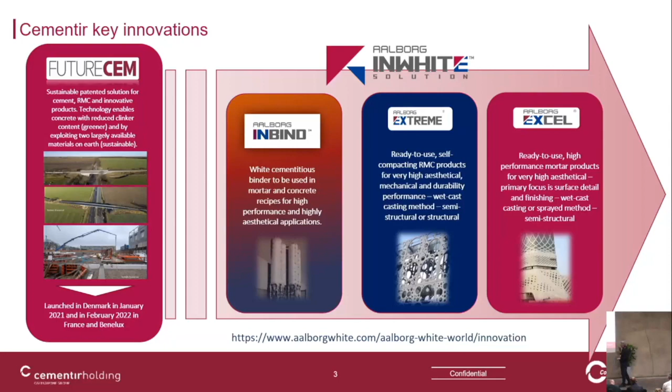This is the innovative solution part, so reducing the carbon footprint by reducing the material used in construction. So lower CO2 emission per square meter. Why choose our solution instead of the others? UHPC is an advanced technology for ultra-high performance concrete, and we know there are many benefits, mainly fast building, because based on precast with this material you can build very fast, reducing wasted time during construction.

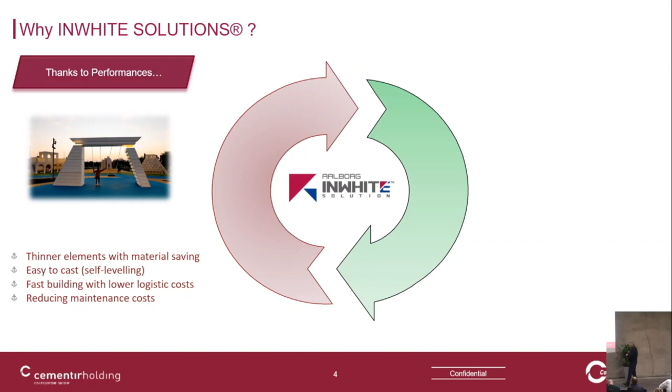For sure, using lighter material is a benefit for transportation cost. And generally speaking, having a thinner material benefits the overall construction because you have more square meters available for the people inside. But what is more with InWhite is the FutureCem technology. Compared to normal UHPC, it is a combination of the two solutions. So less material, and material that has a lower carbon footprint.

So it's a double effect approach on construction, because FutureCem, compared to other cements, relies on more sustainable material. It's not relying on silica fume and the others, but on calcined clay. This is more natural. And limestone is the second most available material all over the world. The key element we would like to share with you is the low carbon technology. You can achieve the same performance while lowering CO2 emissions. This is the key point.

And using materials like calcined clay together with limestone, you have an enhancement of durability. So all our products, which my colleagues will also show, are tested with different exposure classes and so on, guaranteeing durability. Because sometimes durability and low carbon attributes are not aligned together.

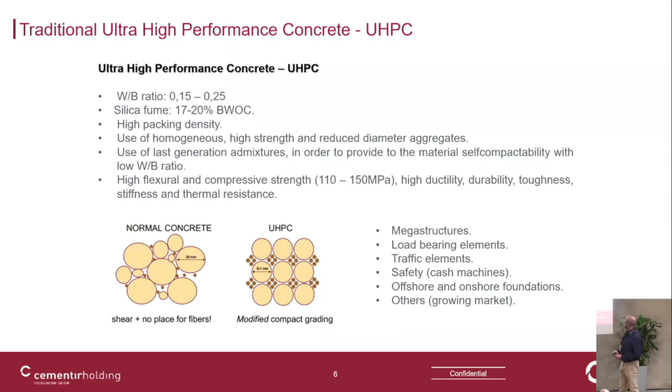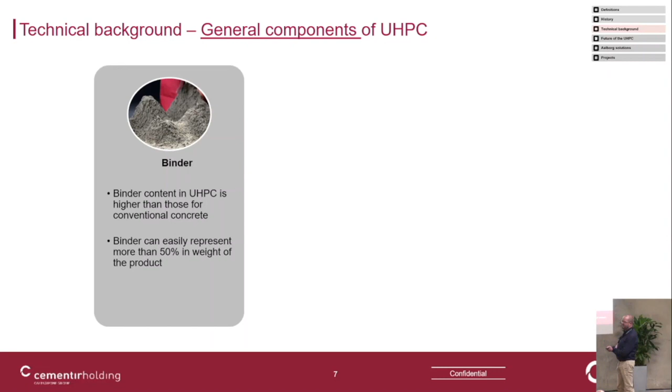Then if we take a closer look at the composition of these premixes, we have, of course, first the binder. In this kind of mix design, you need a really high content of binder, and that can represent more than 50% in weight of the product. Of course, then you have the aggregates, or let's say the sand fractions that we use, with a maximum diameter between 0.5 and 3 millimeters.

And then, to make the UHPC, you also need the fibers to have the flexural strength. And in our approach, that's maybe a bit different than other similar products, we leave the choice to the customer which type of fibers to add, and also the dosage. For structural applications we apply steel fibers, or you can also choose stainless steel fibers. And for decorative applications, you have more the PP fibers, polypropylene, or PVA, or even glass fibers.

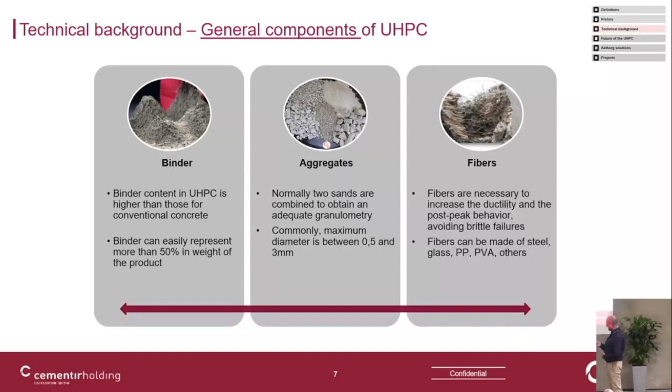If we now take a closer look at the binder itself, in the traditional UHPC the binder is composed, of course, of cement, the Portland CEM I 52.5R, to have the high performance. And then you have the silica fume, which is a byproduct of silicon and ferrosilicon production. These particles are ultra-fines, we call it. It's up to 150 nanometers, so it's in a finer range even than cement. And as filler, there are different possibilities. You can use fly ash, calcined clay, or even limestone filler.

And then the fourth component is superplasticizer, which we introduce in a powder form into the premix. These are last generation polycarboxylate superplasticizers with a high performance. So this is how it looks for a traditional UHPC.

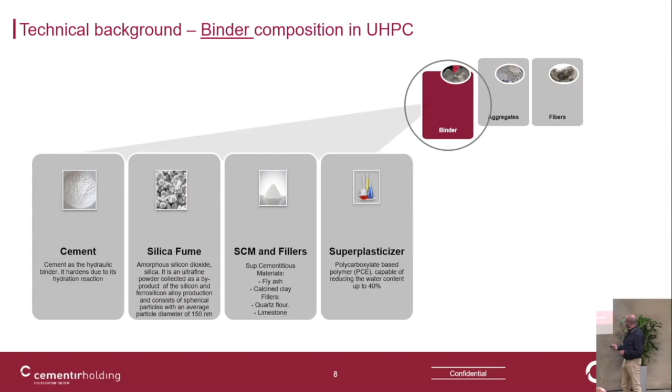But what we have now developed with Aalborg Portland is based on the FutureCem technology, which was already explained. So in the binder we still have, of course, the cement, but we don't use silica fume, and instead we use the FutureCem technology with metakaolin and limestone filler. The reason why we don't use silica fume is because the availability is sometimes a problem. We are working with a white cement, and white silica fume is very rare to find. And also the price volatility is sometimes a risk. So that's the reason why, with the FutureCem technology, we add the metakaolin and the limestone.

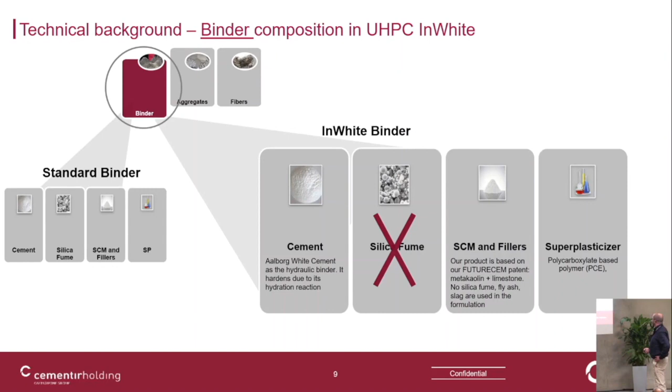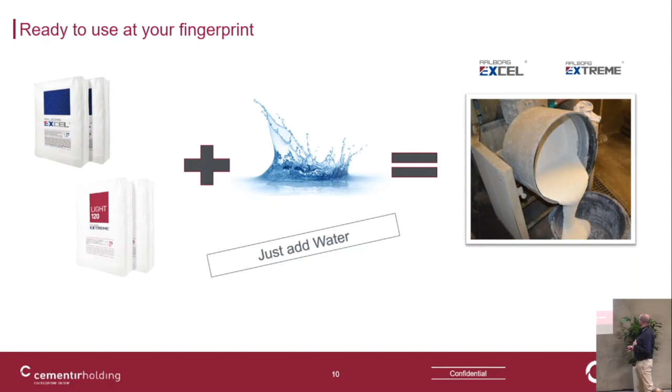So these are the two premix products, Aalborg Extreme and Aalborg Excel. They are very easy to use. These products only need an addition of water, and of course, as these mixes are very finely defined, it is very important to follow the right dosage of the water, to then obtain a self-compacting consistency in the final product.

So the first product we launched is the Aalborg Extreme, and this is a product that is mostly foreseen for structural and semi-structural applications, such as bridges, balconies, stairs. This is for structural application, mostly in combination with steel fibers. The water dosage is 7.8 to 8.2%, so on one bag of 25 kilo, you have to add around 2 liters of water. It's also a shrinkage reducing mortar, with a maximum particle size of 3 millimeters.

After the Extreme, we developed a second product, the Aalborg Excel, with some slight differences. It's mostly about the maximum particle size, where we have a maximum of 1 millimeter instead of 3 millimeters, and that allows an even better flow and also more complex formwork. This product has a better performance. In this product, we oriented more towards decorative final products, such as cladding panels, sunscreen lamellas, ornamental elements, or urban furniture.

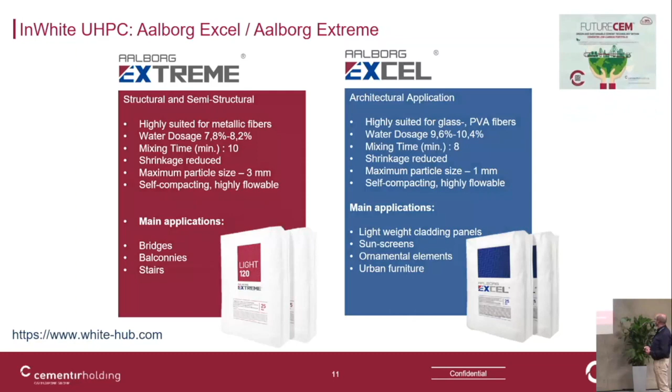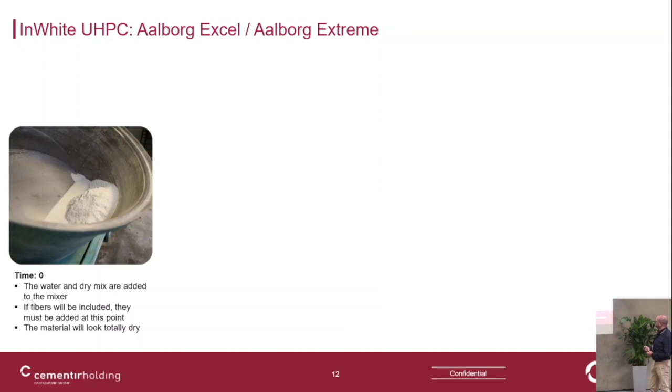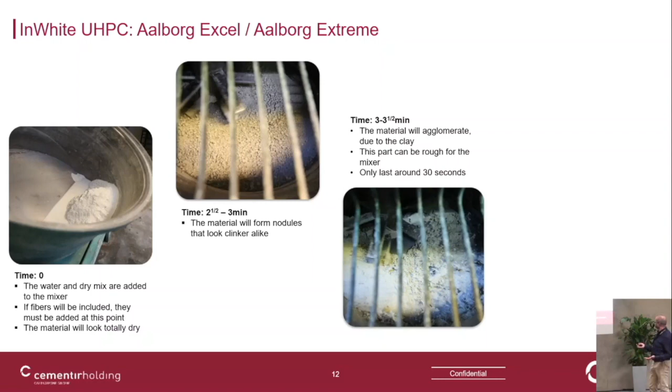To give you an idea of the mixing instructions, it is a special premix where the superplasticizer is included. After adding water, in the beginning you can also add fibers if you want, but it takes a lot of time and energy to reach the good consistency. After 2-3 minutes, it's a bit strange, a dry mix forming little nodules. After some more time, the small nodules become bigger, and then you come into the phase we call the clay phase.

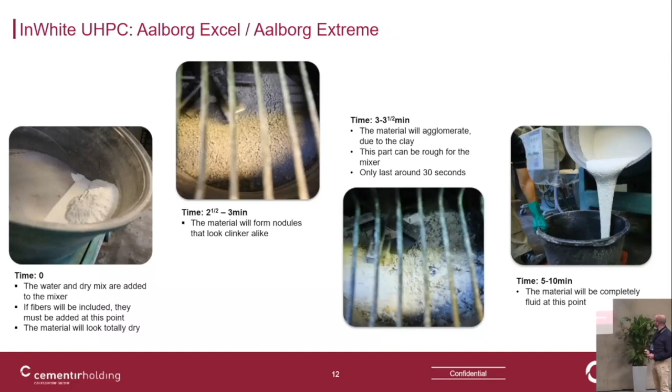Going up to 5-10 minutes, we arrive at the final consistency, and this is a very flowable mix with a spread, with the big cone, of about 90 centimeters. We also do some tests with American standards, with a smaller quantity of mortar, where we have a spread of around 29 centimeters.

To mix this kind of product, you need a mixer that is really powerful, because the reaction of the superplasticizers can take some time. The most suitable mixers are pan mixers. You also have to consider that the capacity of the mixer in traditional concrete may be 500 liters, but it's almost half that quantity that can be mixed in this kind of mixer.

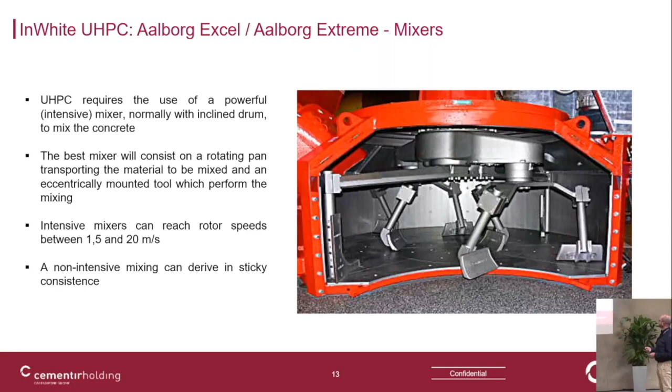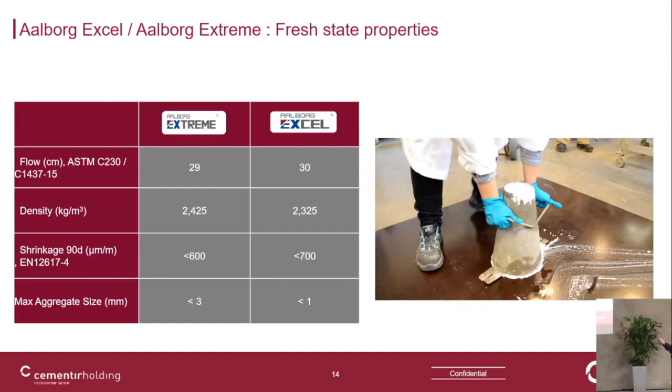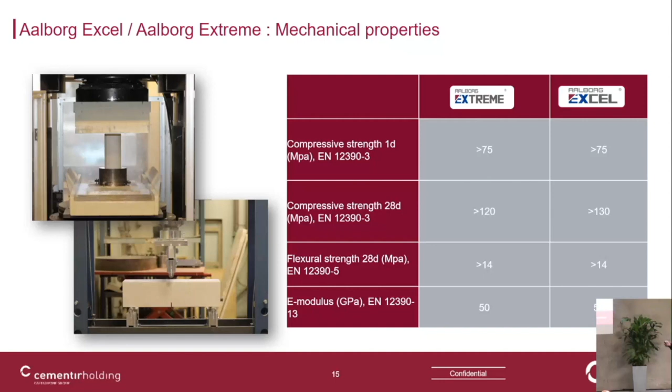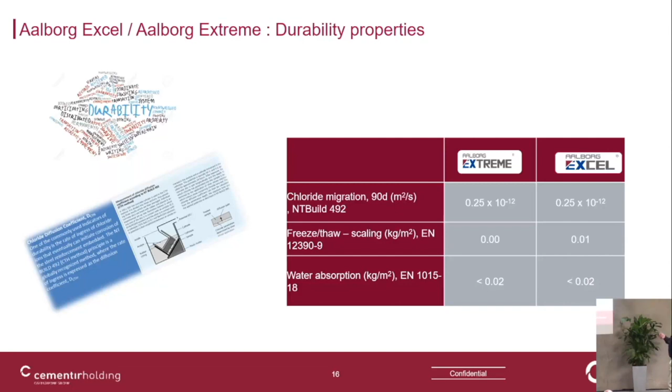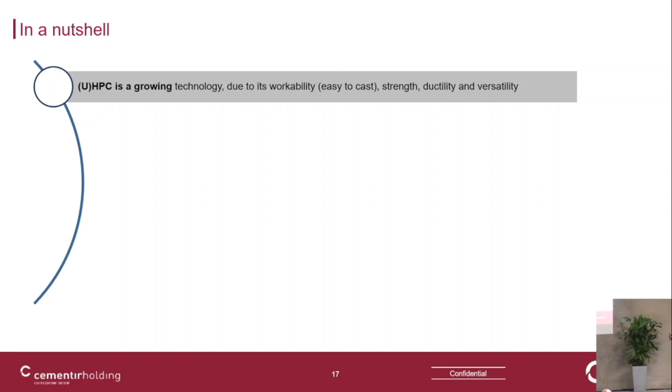So in a nutshell, we see that the ultra-high performance concrete technology, or the high performance concrete technology, is a growing technology. We see each year that the products are popping up in more projects. And of course, the ductility is a main benefit of this kind of material.

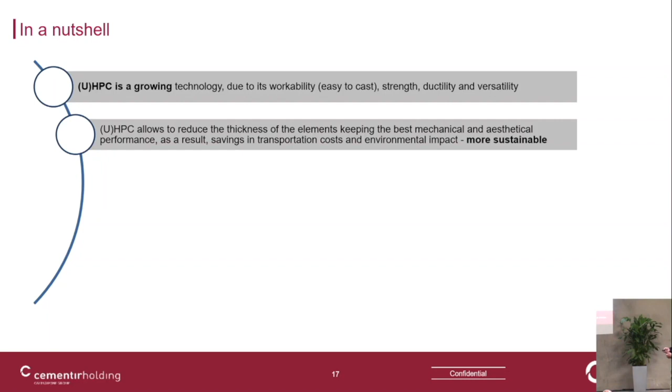So the main objective to use this kind of mixes is, of course, to reduce weight. We can state that in most applications you can reduce weight by 40 to 60%. And the transportation costs, that is also a benefit.

And the advantage also of this premix product is it is very easy to use, and it saves the development and R&D costs for the customer. You have a product with very stable characteristics, and that means a customer doesn't have to invest so much. You can rely on the specifications of the product that we can share with the customers.

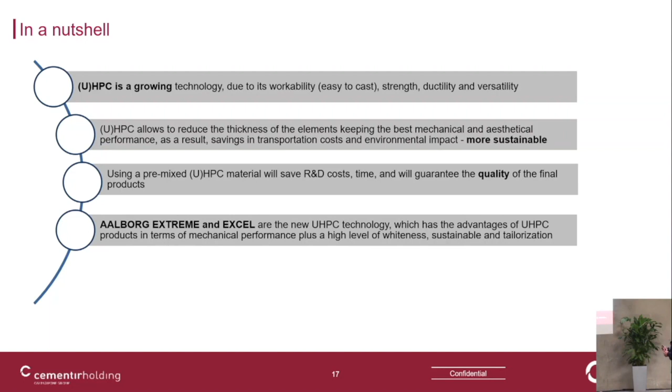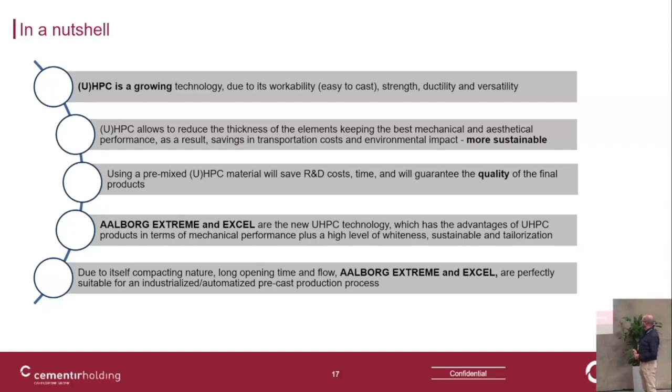So also color-wise, we choose white cement, because also the characteristics of our Portland CEM1 52.5R are very suited to have this high performance. And then, having a product that is self-compacting makes it possible to have a long open time, so you can also use it in a more industrialized precast production process, because it's a very stable product.

Okay, I will now give the word to my colleague Anthony, who will talk about the new concept of InBind.

Thank you, Tom. My name is Anthony Binet. I'm technical sales manager for France. InBind is a new development for InWhite. InBind is the binder used in all InWhite products, Extreme, Excel, and future developments. It's based on FutureCEM patented limestone calcined clay technology, using the highest quality raw materials to ensure the highest pozzolanic reaction and whiteness.

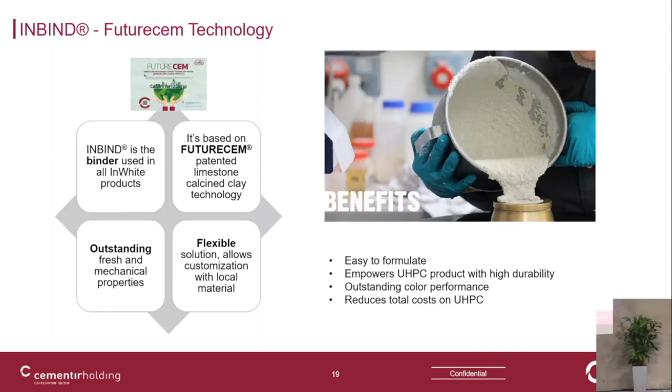InBind has been tested by selected customers with good results in terms of fresh and mechanical properties and durability indicators. The idea of commercializing InBind separately is to allow customers total customization by using their own aggregates, fibers, and additives. With the technical support and the customer's practical expertise, we will be able to develop the mix and their own production process to achieve the mechanical properties and durability indicators that they need.

If we must condense the main benefits of InBind into one slide, this is it. When you use InBind with the right aggregate and a water-binder ratio between 0.21 and 0.27, ultra high performance is guaranteed. It's a flexible solution with total customization. It's possible with InBind because you can use your local sand, your local admixture, and the fiber with your local source and your local partners.

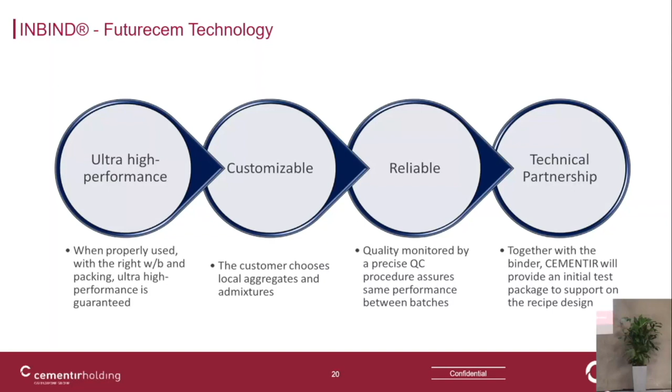The performance of InBind is very reliable because it will not change batch to batch, due to continued quality control with our QC. And also, it's very important that Cementir will provide technical support to assist the customer during the initial recipe design. We have a lot of results for durability and mechanical properties with InBind.

I want to highlight the main benefits and features of InBind: high early and final strength. The whiteness allows you to add a pigment and target a specific color with InBind. It's very flexible because InBind uses just one silo. It's very different from competitor solutions.

When you develop a UHPC solution, you use 3 silos against 1 silo with InBind. You use the binder for your application. And with InBind, you answer the 10 key points for the standards of UHPC.

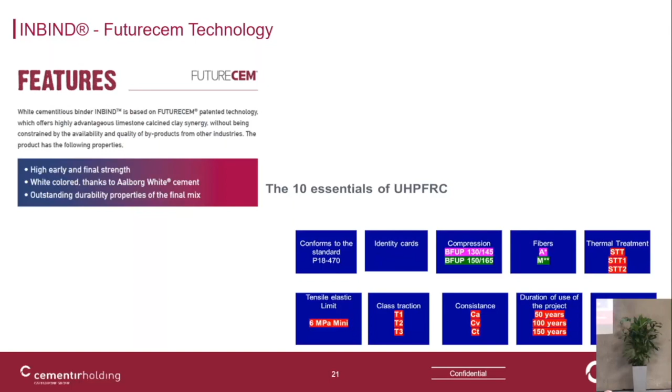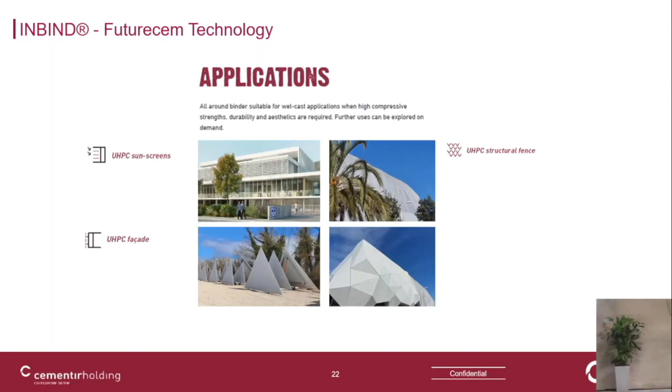InBind can be used for wet-cast applications, where compressive strength and durability are required - for UHPC sunscreens, facades, and structural fences, and outdoor furniture and more applications. In terms of mechanical properties, we were able to achieve a mean compressive strength of 130 MPa by cylinder.

And the flexural strength is 20 MPa. The mix has a water-binder ratio of 0.21, a 3 sand ratio, and 200 kilos of steel fiber.

I hope you are ready to test the performance of InBind in the future. It's very customizable for applications. It's for the precaster, a solution with 1 silo - very practical.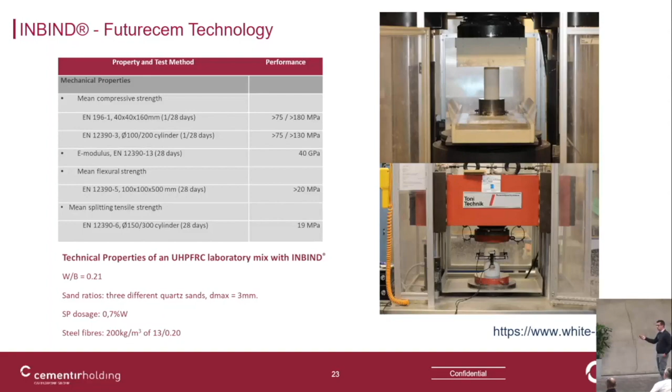Merci. So we can go over some of our reference projects that we have already realized until now. We have references in commercial and residential building, and also in infrastructure projects, and also leisure, city landscape, and furniture.

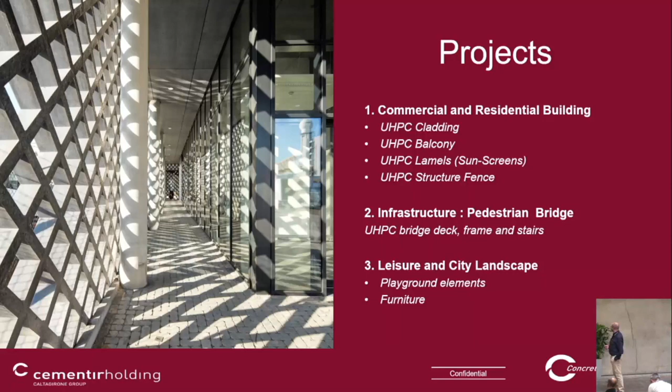In this case, we also made these balcony frames with the customer, but this project will be explained a little later by Enjoy Concrete. And then also the lamels for sunscreens in vertical and horizontal position, which is also more and more common in projects. This is a project in the United States where they made these cladding elements.

These dimensions are, of course, the most interesting part. It's up to 3 meters by 1.4 meters, and we have a thickness of 19 millimeters only.

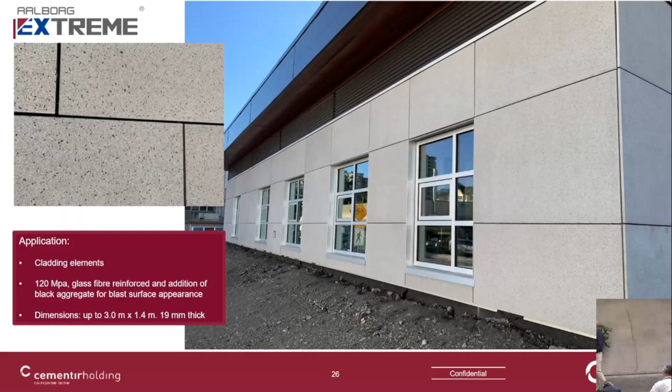In this case, the elements are sandblasted, and they added also a small aggregate to the mix, because normally the premix is defined and fixed. But we already did some tests also for Aalborg Extreme, for example, to add a little aggregate, up to maximum 25%, and you can also achieve this sandblasted result. You can also polish it and make a terrazzo. But the most surprising is, of course, the small thicknesses that we can achieve with this product.

This project is in Reims, France, for the famous architect Rudy Ricciotti, who has a lot of applications with UHPC. Here the elements that were made were about 2 meters 60 long. In total, we made 6 kilometers of these lamels with Betsinor, who was the precaster. The dimensions are only 35 millimeters thick, with a section of 20 millimeters large.

We have also rounded elements in the facade, in 2 directions. And for the formwork, even with complex elements, you have a lot more possibilities than with traditional concrete.

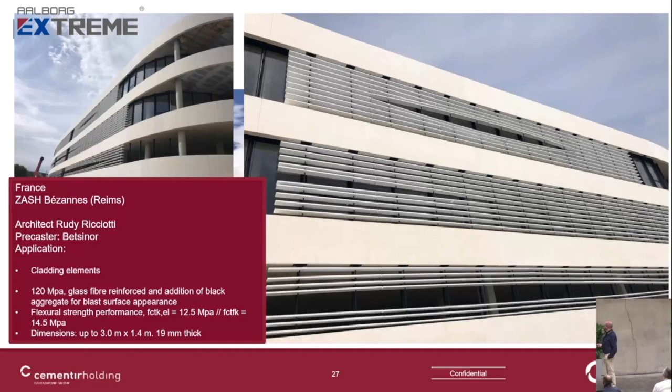Mesh panels - this is another project in the south of France, Antibes, also made by Betsinor. In this kind of mesh configuration, you have liberty for the formwork. You can work with formwork in silicon or even in latex. This makes you very creative with these kinds of forms.

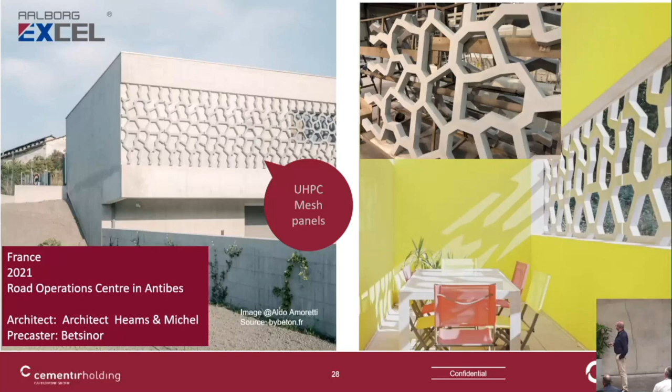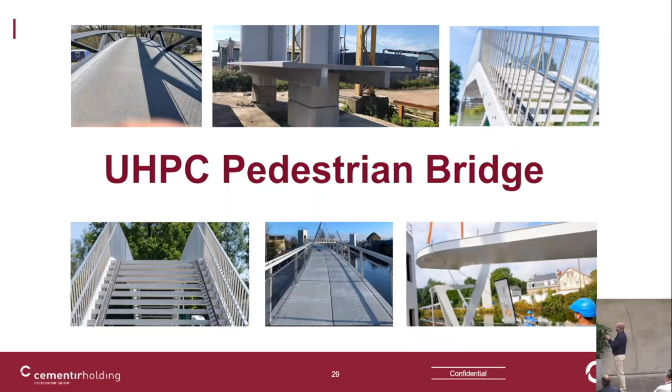In infrastructure, we made some bridge projects in the Netherlands, also in France - a bridge in Amiens - and a project in Antwerp with very thin architecture and thin stair elements. This was made with our customer Waco, and the engineering is also an important part to make this kind of products.

We had a partner, FDN Group, because it is not easy in the concept phase of a project to define the thicknesses, the fiber type, and the fiber dosage. We have to say the know-how for that we don't have in-house, but we found external partners that can help us with the calculations of these structural elements. But it is still to be developed - it's not so easy to find the good partners for engineering.

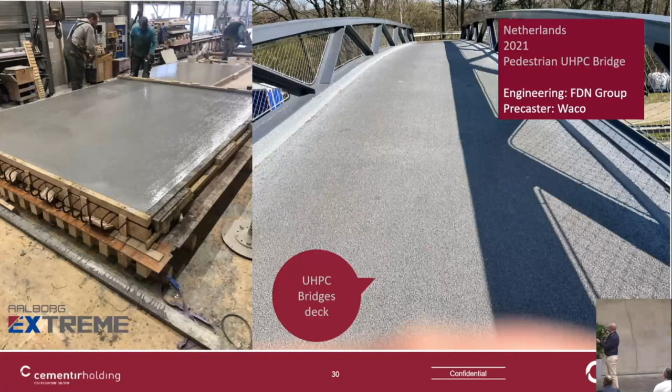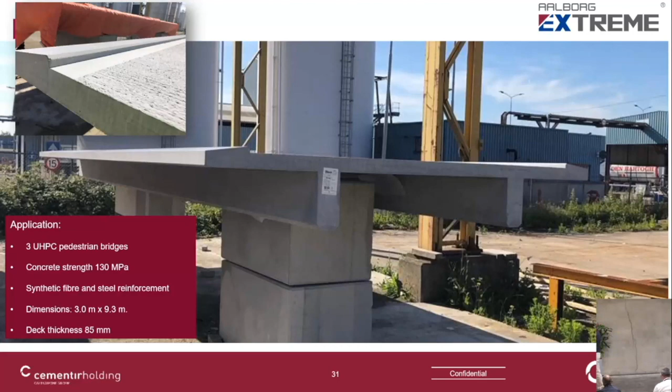A bridge deck, 85 millimeters thick, with dimensions 9.3 meters by 3 meters. This is for pedestrian applications and also for bicycle bridges. It is not yet done for vehicles or trucks, but it's mostly applied in pedestrian bridges or bicycle bridges.

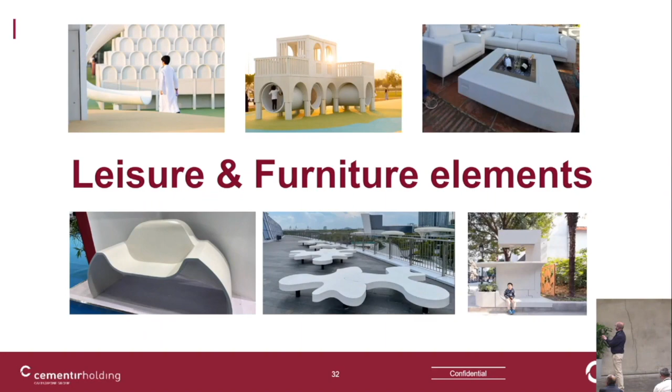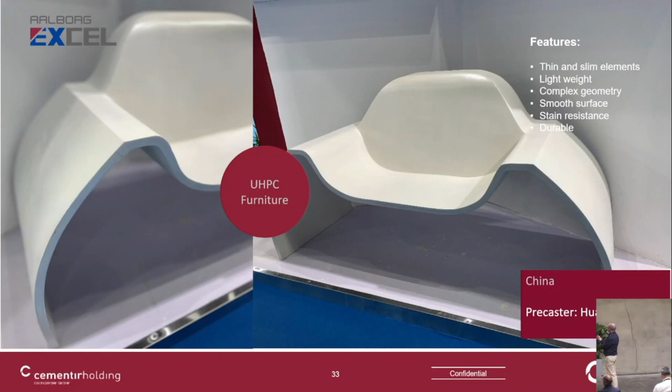For leisure and furniture elements, you can also have a challenge to make very thin elements - very nice designs with small, slim dimensions. This is a project in China. There's also a project in Spain - tables, benches - so you can even make lamps or things like that for the furniture market, and it is very durable.

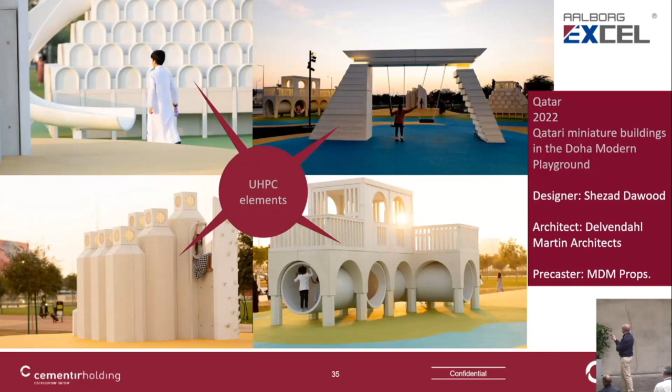This is a project in Qatar for a British architect, made recently for the football championship in Qatar - it's a playground for kids. So yes, all these elements are very slim, with a nice result.

These projects show that you have a lot of new applications where this product can be used, and of course for durability, it's good to reduce the weight of the concrete. Also with the FutureCEM technology inside, we have, let's say, two advantages where the product can rely on.